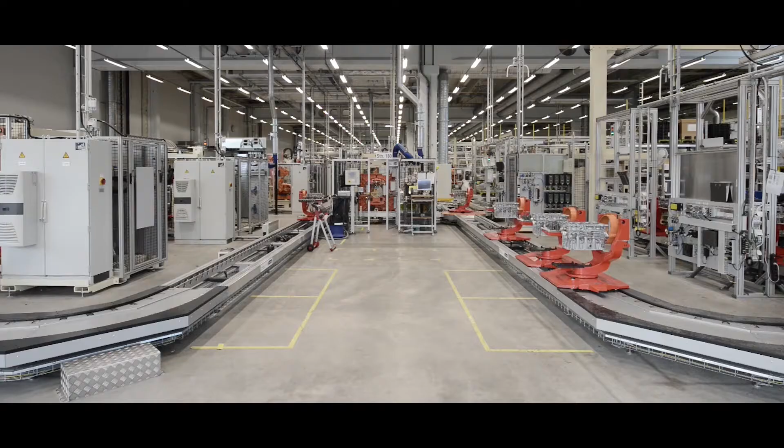Some say that the future of industry is a factory that is fully automated, where no people work. MANUWORK disagrees. The future of industry is a factory where people and automation solutions work together and use each other's

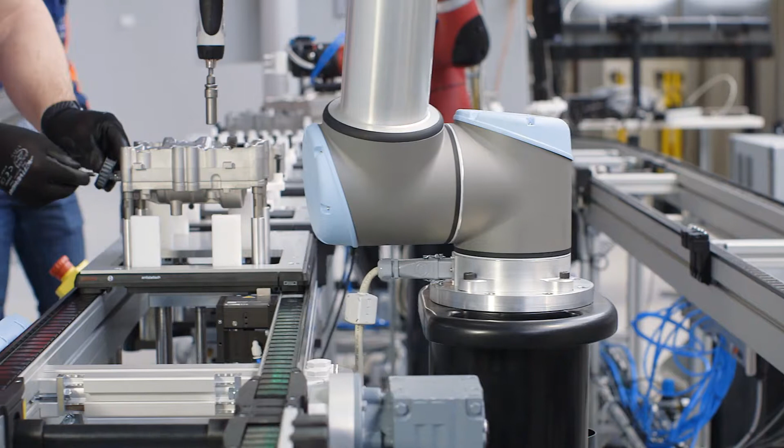strengths to increase productivity. People will remain at the heart of the production tasks, and this is where MANUWORK comes into place. MANUWORK aims at developing solutions for improving the quality of jobs within the manufacturing sector in Europe, while at the same time improving the competitiveness of European industries.

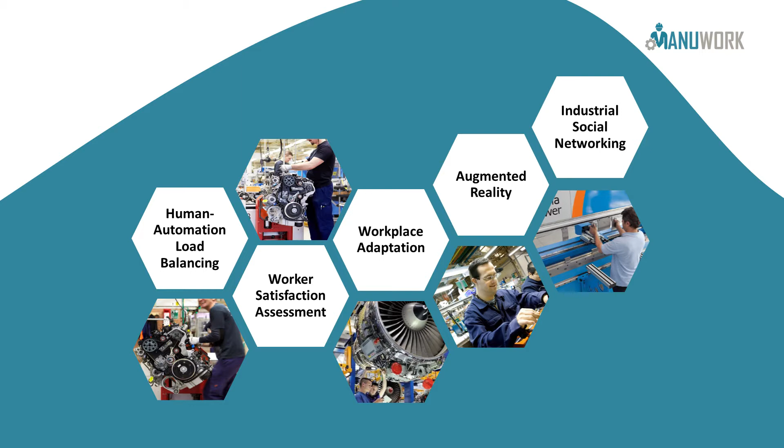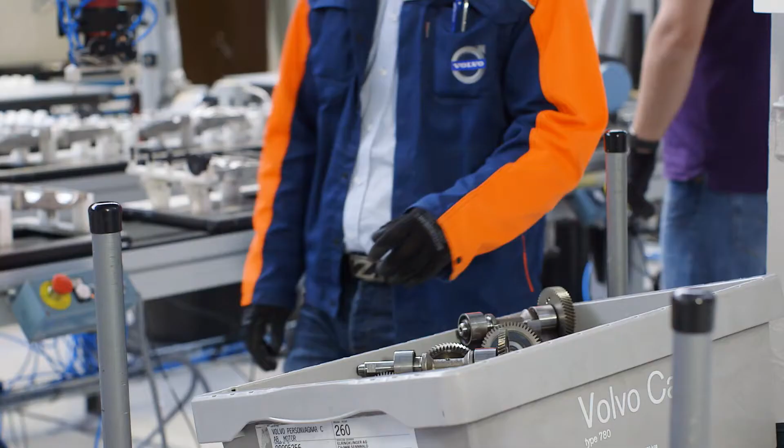MANUWORK project has developed solutions to assist operators in the factory when working together with machines and other operators. We have developed solutions based on technologies such as augmented reality, collaborative robots, industrial social network, and intelligent algorithms for optimizing the workload between a human and the machine, as well as methods for evaluating worker satisfaction.

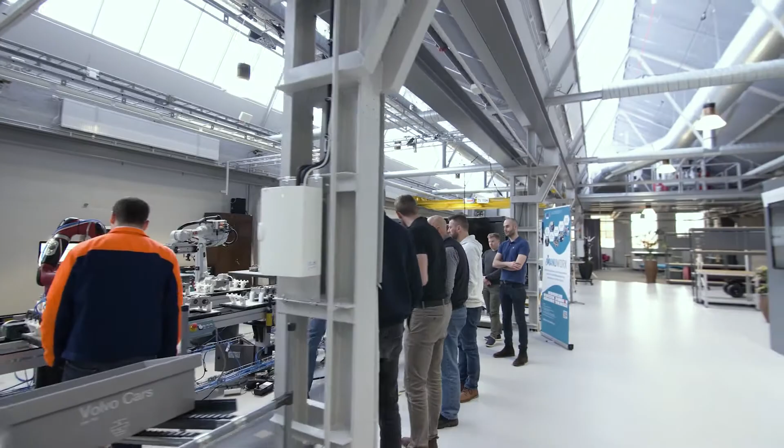The physical demonstrator of the automotive pilot has been built in collaboration between Volvo Cars, Järnbro, and the University of Skövde at ASSAR Industrial Innovation Arena.

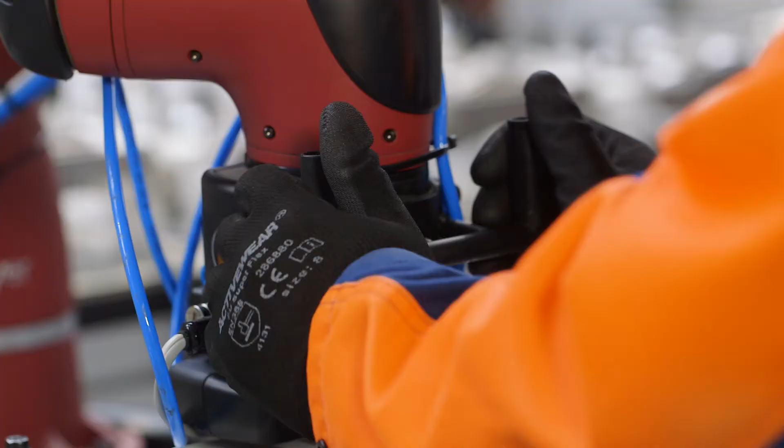The pilot serves as an example of potential uses of collaborative robots and how they can be used in order to improve the conditions for the worker. By removing repetitive and heavy tasks from the human and letting the robot perform them instead, ergonomics will be improved at the workplace, thus increasing the well-being and satisfaction of the workforce.

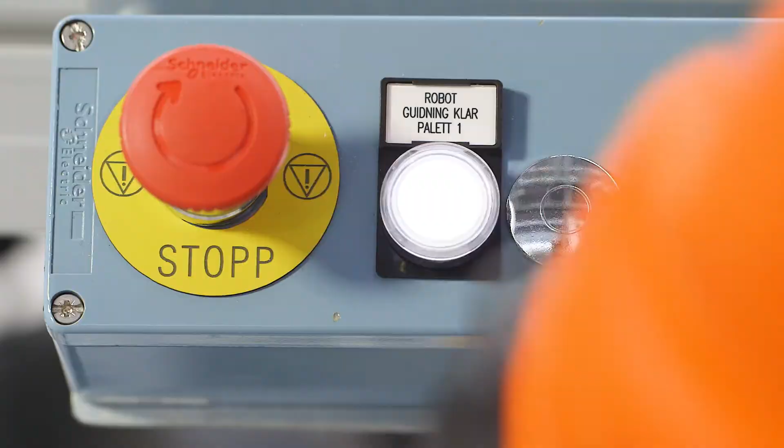We see it as a good way to improve the workplace for the people in the factories. We can try them here at ASSAR and see how we could potentially implement them in our production.

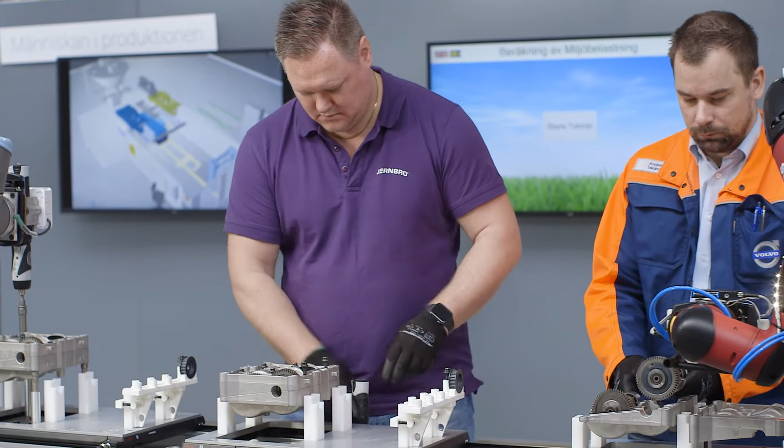One of the main challenges has been safety. How can we implement the collaborative robots in a safe way when we want the workers to be working closely with the robots? But also, implementing collaborative robots means that we will have a new type of balancing problem.

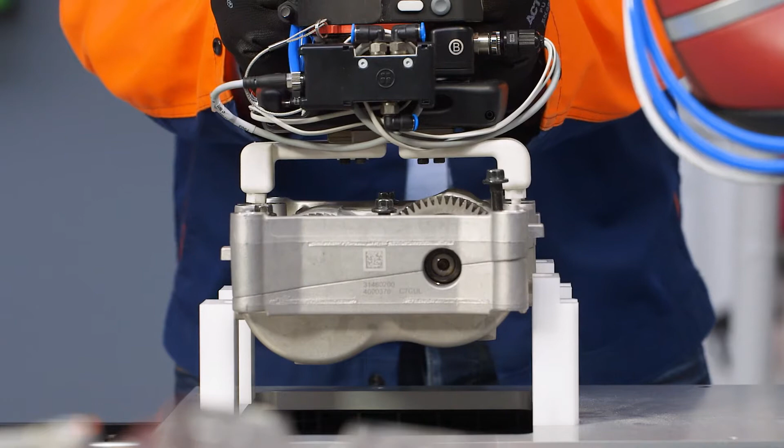Much of the engineering work today is performed and tested virtually before being implemented at the production line. The introduction of collaborative robots will lead to new challenges for the engineers that are planning and preparing the workplace.

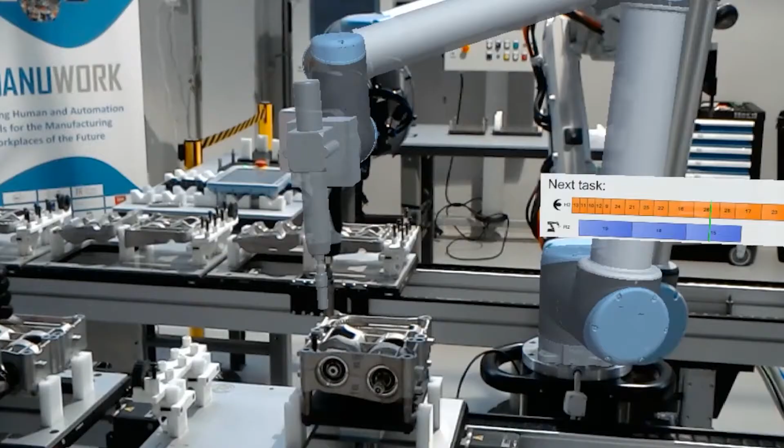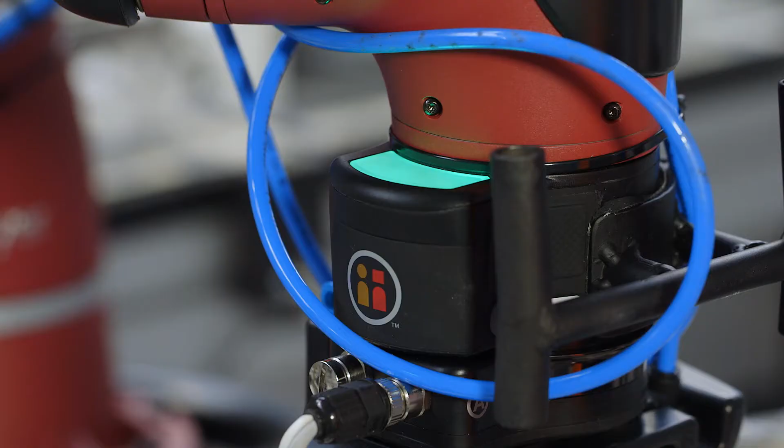Having multiple resources at the stations will increase the difficulty and the time it takes to balance the tasks between the human and the robot. Therefore, new tools are needed, both for assessing the time it will take for the robot to perform a task, but most importantly, a tool that can optimize the balance of work between human and robot.

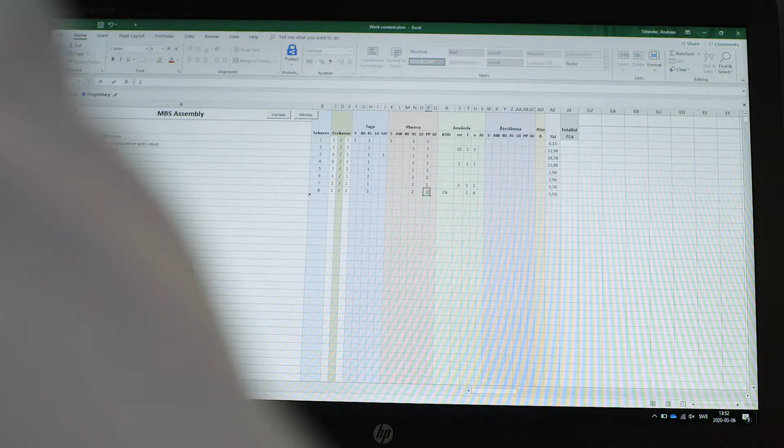In Manuwork, the University of Skövde have developed a tool to do just this. The load balancing tool helps the experts and engineers to find and decide on the best distribution of tasks and resources among the stations, especially when we have multiple resources at the stations and human-robot collaborations.

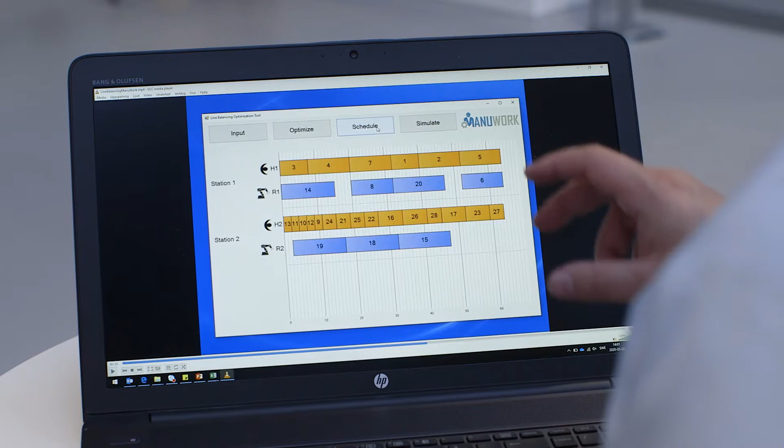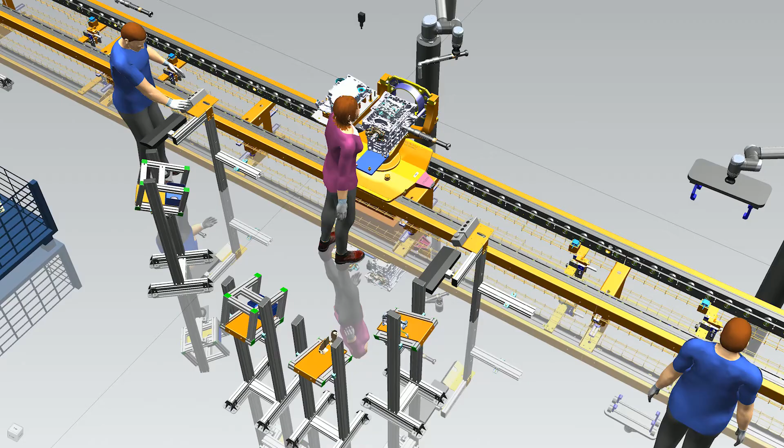The tool does not only help the users find the best distribution of tasks, but it is also supported by a simulation generator, where the results can be automatically simulated in a simulation software, and the experts can further make scenario analysis and test the solutions in a virtual environment before implementing them in the real production.

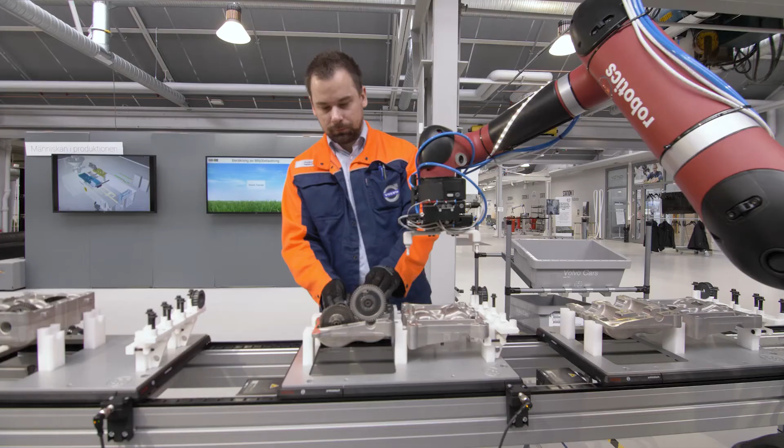Future workers should be able not only to work together with physical objects, but also together with their digital counterparts, the so-called digital twin. They will have to collaborate with machines equipped with advanced artificial intelligence technology.

However, this creates new challenges to be solved. For example, we need to consider how to create trust in the collaboration between human and artificial intelligence systems. We expect that these technologies will empower the operator in her task.

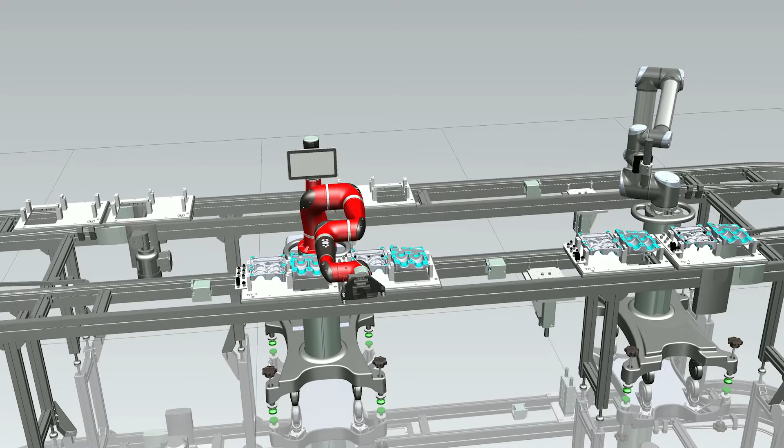The tool can be further extended by considering sustainability and environmental aspects. Minimizing the energy consumption at the stations can also be considered an important development area in the future.

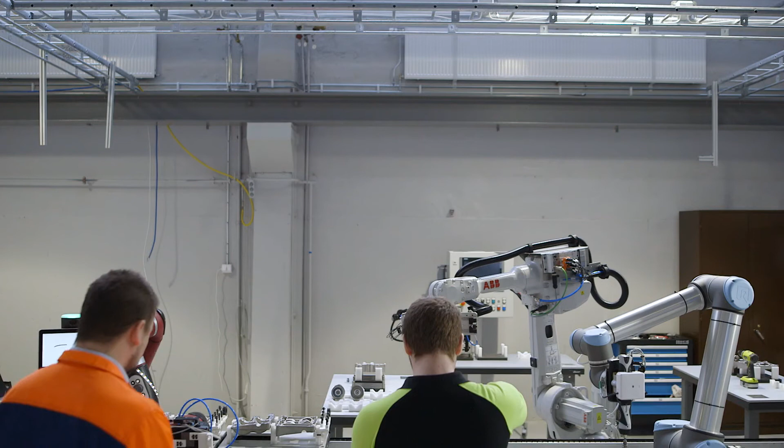We need to figure out how to implement collaborative robots in production, what types of stations we can use them in, in order to improve the workplace.

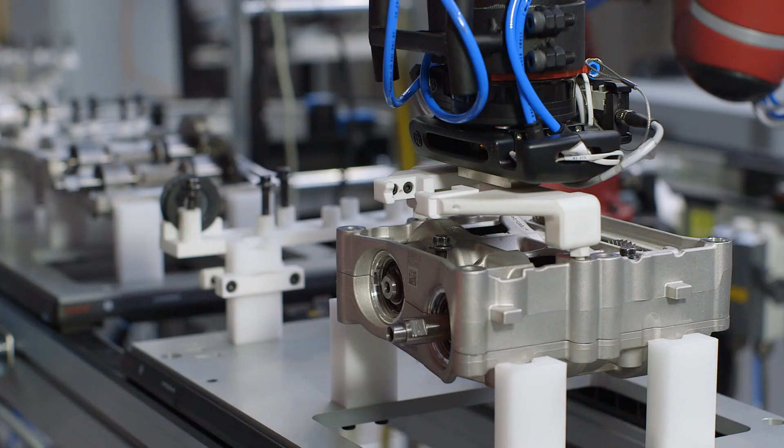In the beginning of the project, we thought that it would be very tricky to implement the collaborative robots in a safe way. But Järnbro has shown us that we are not that far off, and we are confident that we will shortly be ready to try it out in production.